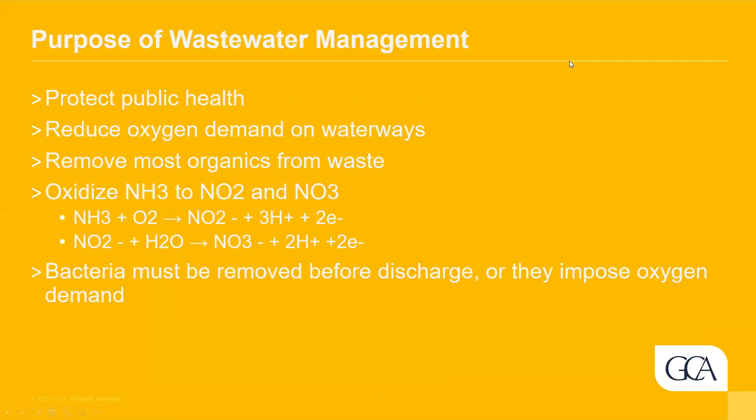Here we are, Gulf Coast Authority, and I'd like to speak about the purpose of wastewater treatment and wastewater management. Obviously, it's to protect the public health. Gulf Coast Authority was created by the state of Texas to protect the waters of the state of Texas. And we had the unique ability to build regional wastewater treatment plants, which means we can combine multiple cities and municipalities, MUD districts, and industrial wastewater plants in one collective plant.

For example, our Bayport facility has 83 different industrial wastewater streams. The facility I'm at has 4 different participants, being 2 cities and 2 MUD districts. We also have 3 other plants that are collectively treating industrial wastewaters. So we have the unique ability to write permits and hold the users accountable rather than those users going through TCEQ.

Part of the wastewater management purpose is to reduce oxygen demand. As you may know, lower DO in the receiving stream can cause fish kills, and it's harmful to aquatic life. So our number one concern is that aquatic life and the environment of the receiving stream. With our wastewater treatment plant, we remove organics from the waste. We oxidize ammonia to nitrite and nitrate, and the bacteria is removed before discharge through disinfection. We have multiple ways to disinfect, and that's our final treatment process.

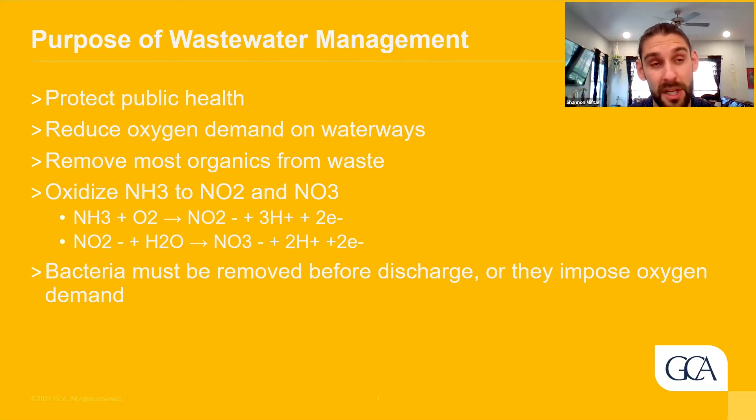And we're beginning to have more and more regulations with new criteria that need to be met in coming years. So that will potentially add more treatment processes.

To start with the fundamentals of wastewater treatment, in a regular municipality, we have our collection system. That's the sanitary sewer line that runs underground. We have several connections coming from houses, commercial units, as well as industrial and any site that you may think of: your houses, the car washes, the malls. They have a gravity sewer that runs to either a force main or another gravity line.

These sanitary sewer pipelines usually run via gravity to a lift station, which is a large sump that has multiple pumps that lift that water from the lowest elevation to a higher elevation. That way it can ultimately gravity flow through the wastewater treatment plant. So this is the initial part of the treatment. No treatment actually occurs here. It's just the collection system to get the wastewater to the receiving plant.

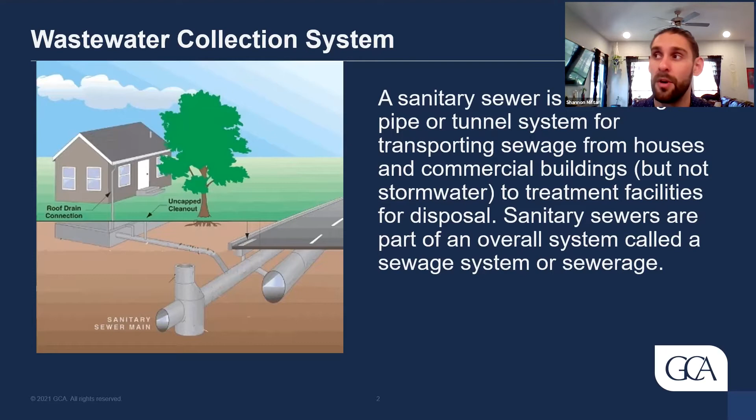Here we have what is called pretreatment. This is where we have raw wastewater, and we try to take out some of the inorganic materials. Things that you can imagine: debris, any sort of logs or plastics, beads, any sort of thing that may enter your collection system that can be removed via screening.

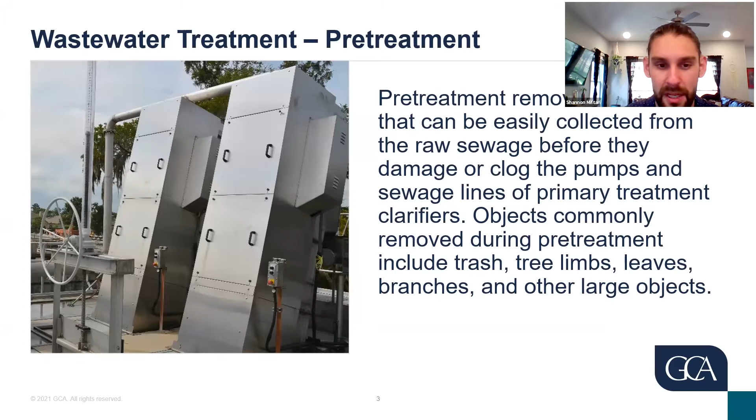Here, this is actually a picture of our wastewater treatment plant that has 2 bar screens. If you remove those covers, there are these 1/4-inch screens that keep all the rags and other inorganic debris out. They have rakes that lift up all that inorganic material, and it goes into a conveyor that's ultimately compressed and thrown into a dumpster. That will be hauled on a weekly or bi-weekly basis.

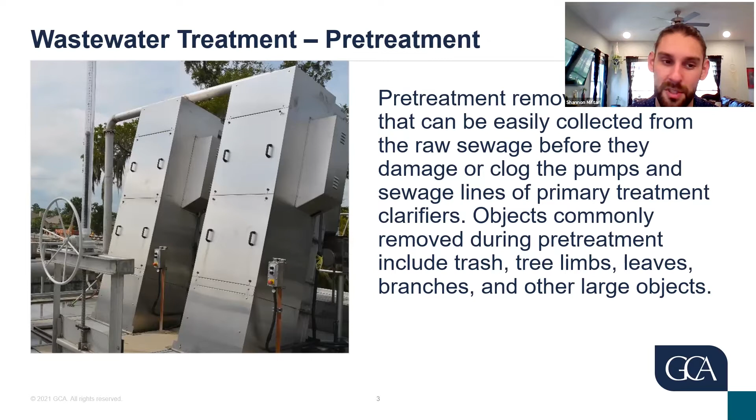The purpose of this is strictly pre-treatment. We're not into the biological or any other treatment process here. This is just removing materials that can cause issues to our pumps and other processes.

So here, in the pre-treatment, again, we have screening of inorganics, and an issue we've been having as of late, one of our main focuses to educate the public on, is things like baby wipes. Although they're said to be flushable, they cause many disruptions downstream. They may be able to enter your gravity mains and your force mains, but when they get through to the screening process, they can cause lots of issues as well as through the pumps.

So things like the coffee grinds, your bacon grease, the fats that may be poured down the drain, and primarily the baby wipes will come in and they'll clog the pumps and they'll get stuck in the rotating assemblies. And that's been our main driver for maintenance and cost at the wastewater treatment plant.

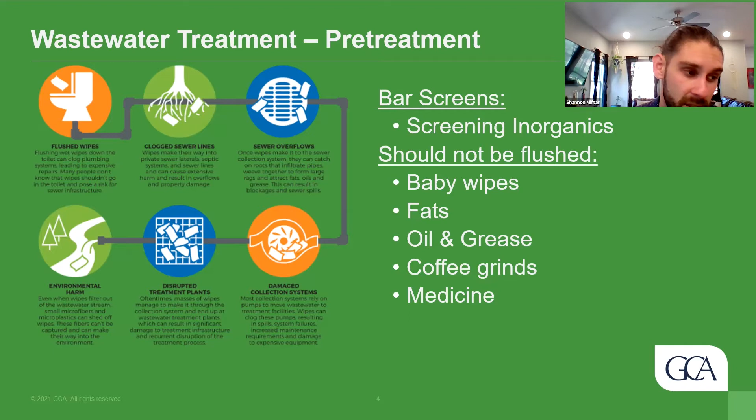So if you speak with your students, that's one thing that I always promote mentioning is that baby wipes, although they say flushable, they can cause millions of dollars worth of damage. And we've seen that at many places like in New Jersey, city of Houston, all throughout the nation. This has been a big dilemma, there's been lawsuits out, there's been a lot of activity here to prevent that.

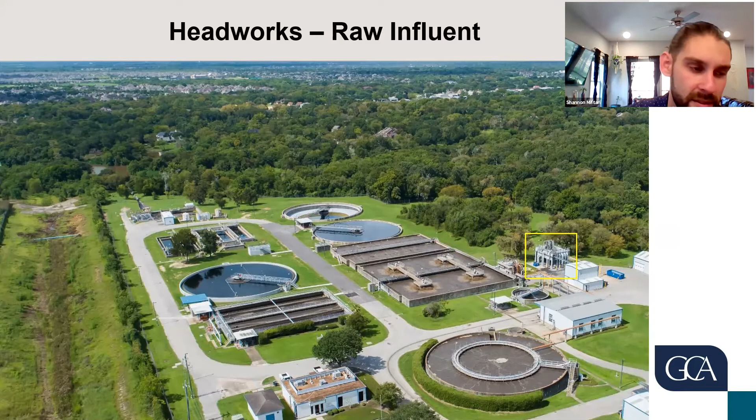So in our treatment plant, we have this yellow box of our Headworks. Basically, we have off-site lift stations that'll lift the wastewater from a lower elevation spot up to the Headworks, which in this case is about 25 feet off the ground. So it pumps to a sump that's elevated, and from there it'll gravity flow to the other stages of the plant. And the reason we want the gravity flow is to minimize the need for pumps or backups or other issues that may happen. So next we move on to the biological treatment.

This is basically the heart of the plant. This is where the majority of the work occurs by our microorganisms that are found naturally occurring in our intestines and are naturally occurring in the environment that we're providing. Basically, our goal is to provide enough oxygen, the correct temperature, and enough nutrients to keep the healthy bugs alive and consume all the organics.

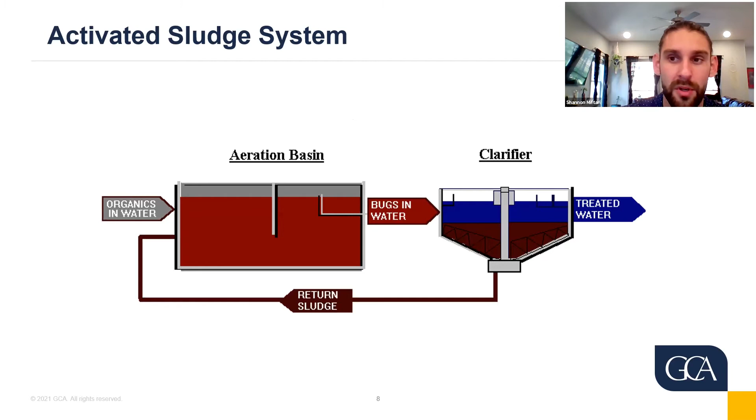So here, this is the heart of our plant and most of our plants for the authority. We have a secondary treatment process. So our aeration basins are the biological process. This is where we have the raw sewage mixed with the sludge, and we provide compressed air into the mixture. All of our plants have dissolved oxygen in which we supply air via large blowers.

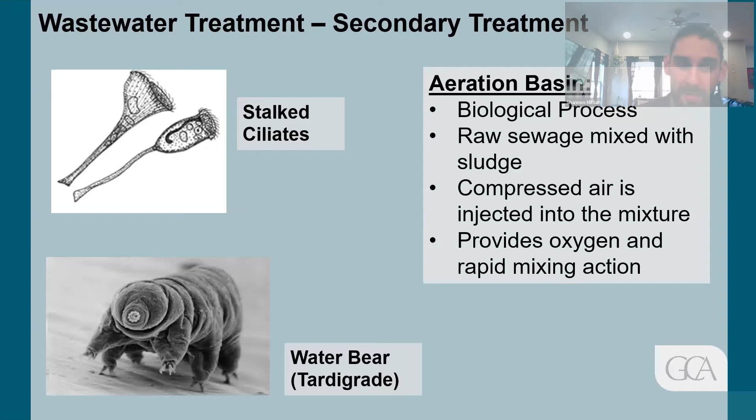And these, or through mechanical aerators, which are essentially these big motors and gearboxes that are attached to a large fan blade that causes a mixture and dissolves oxygen into the water. But newer technology includes blowers that supply piping into the basin and provides compressed air.

Some of our plants also have a direct oxygen line, and our goal is to also provide mixing. If you have dead zones, you can have septic sludge, foul odors, and other issues. So it's really important - if you do not have a good blower system, the result will be untreated wastewater.

This is likely the most important part of the treatment process for activated sludge plants. Here we have a couple images of microorganisms you may see. A very popular one is the water bear, the tardigrade. It's been known to be the one microorganism that can make it to Mars and survive. It's nearly indestructible, naturally occurring in our intestines, and also seen in our wastewater.

So if we collect a sample of our sludge and put it under the microscope, it is likely that you'll run into a water bear, stalked ciliates, and many other microorganisms.

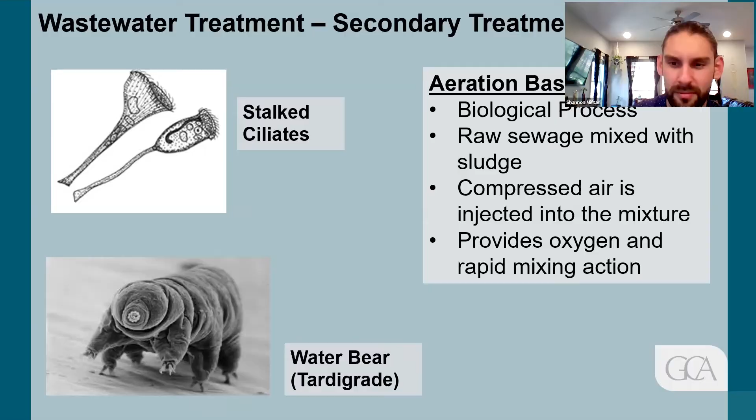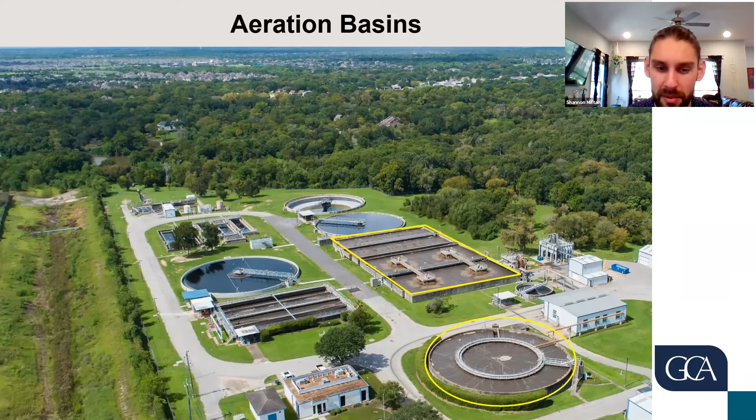Here's a picture of our aeration basin. We have 5 basins here in the rectangle. The front 2 basins, you'll see those 4 squares - those are mechanical aerators mixing the water with large fan blades. On the back 2 and the front circular one, you can see air bubbling in, and that's how we provide dissolved oxygen.

At times, if you have an upset in your plant, the sludge will belly up or build up so much that it starts to go over the weirs. When those solids go over the weirs, it'll clog up the rest of your system or not allow your disinfection system to fully penetrate the water and disinfect. That's a big issue that we try to prevent, and it can happen with major power outages, a bug kill, or equipment that's shut down.

Yes, Larissa, question? So I see all of that is like open air treatment - is it good when it rains a lot for water treatment plants, or is it not ideal? Or does it matter? Yeah, that's a great question.

It's actually our biggest harmful issue for most wastewater treatment plants. It's not supposed to be, because ideally your city has a separate stormwater system that does not go to your wastewater treatment plant unless permitted, which is rare. But regardless, what you'll see is I&I, inflow and infiltration, where water infiltrates the system through broken pipes, open manholes, or gutters directly piped into your sewer, which they're not supposed to be - or just a large volume of rain after the ground gets saturated will infiltrate the system.

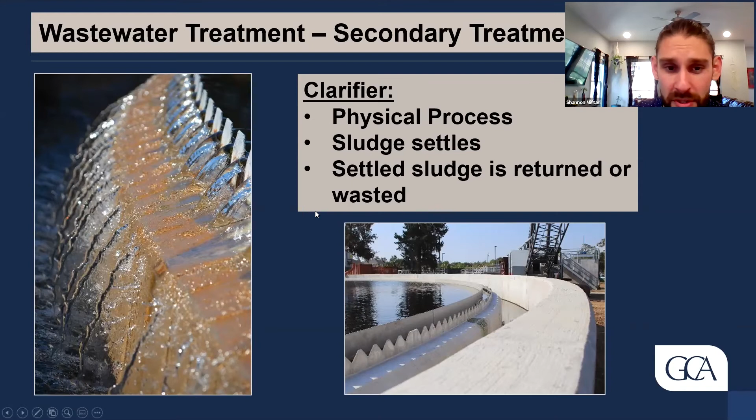And also when you have these major freezes and you do not have power for an extended period of time, you can have a bug kill just from the lack of that mixture and the lack of the dissolved oxygen. And what you'll have to do is remove all that sludge. It becomes septic sludge. So you have millions of gallons of septic sludge that you have to essentially get to the landfill. And that for us took roughly 3 or 4 months. So natural disasters is what to look out for.

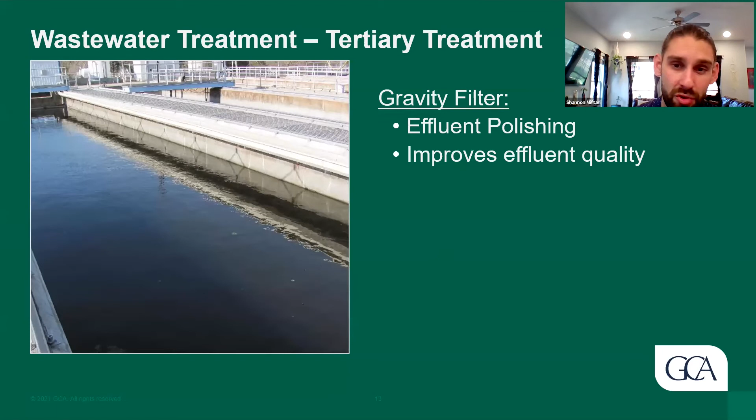So post the secondary treatment, not all plants have this, but what we have is tertiary treatment through gravity filters or sand filters, as you would see in a fish tank or aquarium. There's basically sand and anthracite here that takes the effluent water from the clarifier and polishes it through these sand filters. And we'll have these traveling bridges that continuously clean the water. The reason why we're required to do this is because we have a disinfection system that requires strict clarity in the water. And we'll discuss that next.

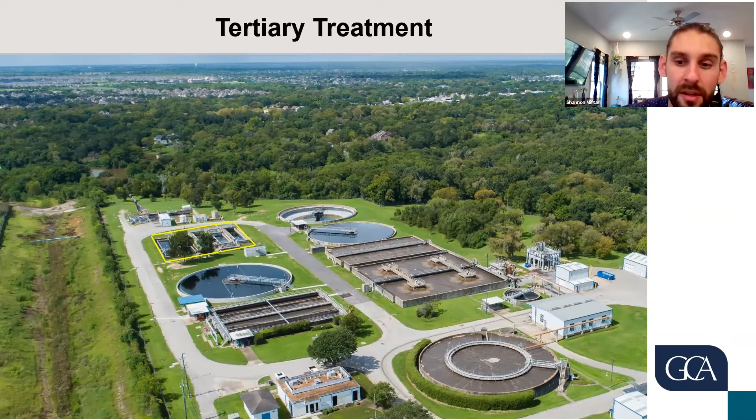Here's our tertiary treatment. We have 5 sand filters, and we continuously see evolution of this technology that allows for greater flows and different media, different materials that better polish the water. So we're working on upgrading those because they were built in the 80s and 90s. With new technology, you can increase the flow and the flow per surface area by 4 times or 5 times.

The United States is kind of behind on ultraviolet treatment in wastewater treatment plants, but in other countries, you'll see UV predominantly as their disinfection process. And we're starting to do that a lot more here. After disinfection, this will be our fully treated wastewater. And we have the ability to reuse this water as non-potable water for irrigation, or it's reused throughout the plant to wash down areas or supply water to our equipment like our belt presses.

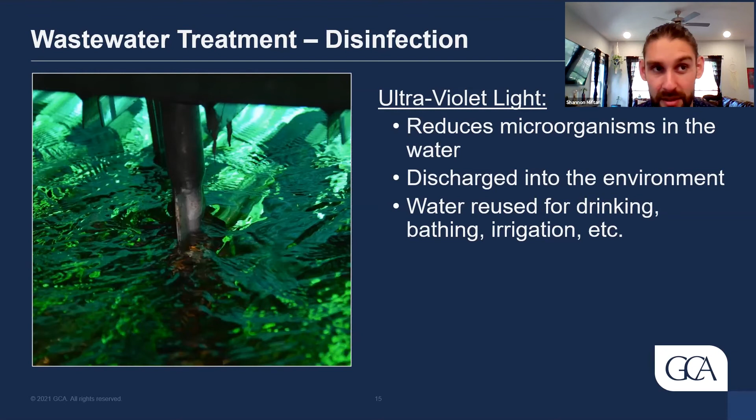And now we're also starting to see direct reuse. So you'll see wastewater treatment plants with a pipeline that directly sends water to a water treatment facility. And that's also something that I look forward to in the future, because we will have strict control of our wastewater that's being sent to the water treatment facility. Currently, what we do is we discharge our wastewater into a receiving stream, and then we pick up from that receiving stream to create drinking water. And you will see actually more difficulty in controlling those parameters that are coming into the plant. It's a big topic to try to get the public aware and accepting of the idea of from toilet to tap, but it is on the horizon. And Texas already has one treatment facility, I believe in West Texas, that is already having direct reuse.

So our disinfection is here at the back left part of the plant. And if you can see that long line of water, that is what's called a Parshall flume. After disinfection, it'll go through that channel and we'll test our dissolved oxygen at that point, as well as the rest of the parameters. Our permit limitations are written into a table of our permit. And generally, what you'll see is limitations on biochemical oxygen demand, on ammonia, and on total solids, as well as dissolved oxygen and pH. So those are common parameters for municipalities.

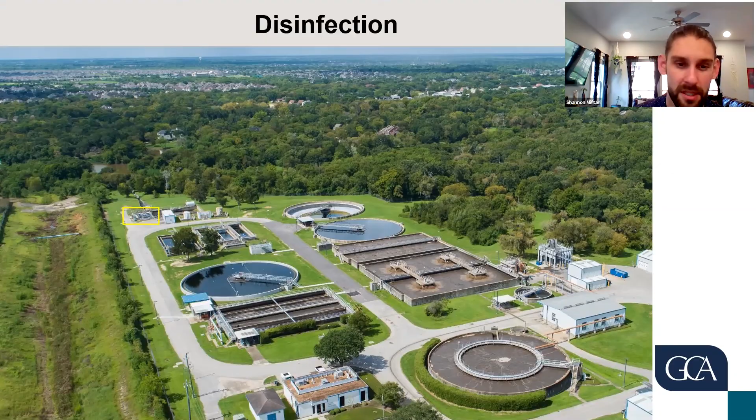In industrial wastewaters, you'll see a very long list of organic compounds consisting of roughly 200 compounds that need to be tested for and analyzed and have their own permit limitations as well. So here, I know your students will be doing a different sort of sampling. Here we have a gentleman picking up a sample. It's important to read your permit and correctly identify your sample point. Otherwise, this can be a violation by not collecting in the correct spot. Typically, what you'll see is a composite sampler that collects a sample either based on flow or based on time, and it needs to be refrigerated at a temperature of 0 to 6. Or otherwise, what you'll have is grab samples.

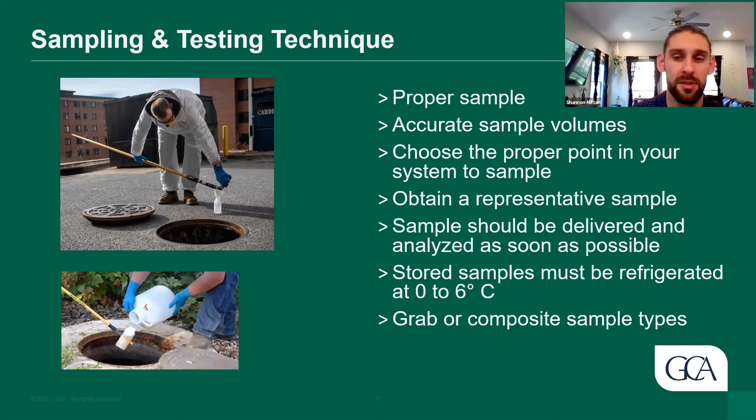And grab samples are required for certain parameters. And sometimes those grab samples will be composited for that 24-hour period. And again, some samples need to be refrigerated, some don't. Some have long holding times, like 1 year, and some have holding times of 8 hours. For example, enterococci needs to be analyzed almost immediately. pH needs to be analyzed in 15 minutes. Dissolved oxygen needs to be analyzed immediately. So there's different parameters, different requirements for each testing method and technique.

Here are some of the testing that we do on our wastewater. Our DO uptake measures the rate of oxygen use, so our dissolved oxygen. SVI, sludge volume index, that's something we use to detect the settleability. MLSS calculates a number for us to detect how healthy our sludge is and how well it'll thicken. Same with the zone settling velocity, what we typically call the 30 minutes settling test.

And we pour up our sludge samples into cylinders and we'll see how it settles, whether it settles evenly, rapidly, slowly. If it floats, that'll tell us the age of the sludge. If it settles rapidly, it's typically older. If it settles very slowly or not uniform, it's younger or could have a filamentous issue. Generally, you want your sludge to settle evenly and you want a sludge of about 300 or 400 milliliters out of 1,000.

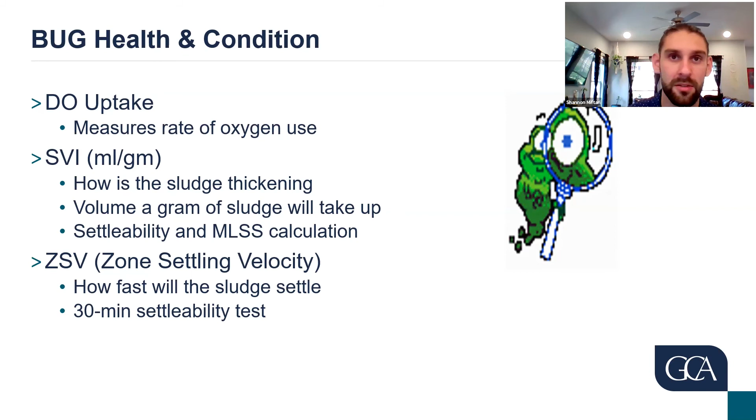And then on our discharge permits, obviously any treatment plant is not allowed to discharge without a permit. Here in the state of Texas, all of our permits are through TCEQ and we have TPDES permits. This is why we were created, to abide by these permits and meet the Clean Water Act.

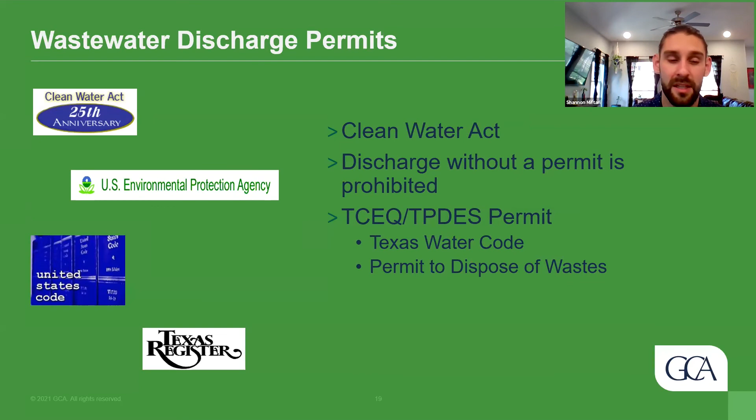Some of the limitations and conditions we spoke about, and our goal is to continuously monitor and report any issues that we may have. We're required to report any issues within 5 days or 24 hours if it meets certain criteria. Otherwise, it would be in our monthly discharge monitoring report. So every month and it's public information, we submit our discharge monitoring report with all of our sample analysis data

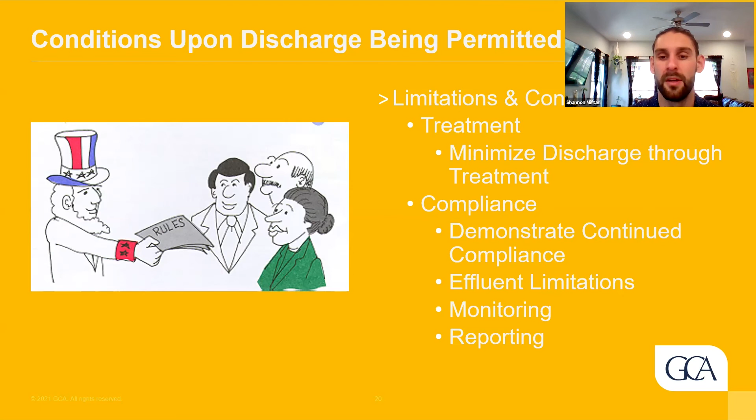regarding our effluent limitations. So some of the basic functions of a wastewater permit here are listed. There's different levels of performance, and it requires a discharger to report failures. If you're part of any public system, we have online capabilities to upload this information, and we'll send it via email and hard copies as well. And we'll have to notify the public should it exceed a certain volume or a certain limitation.

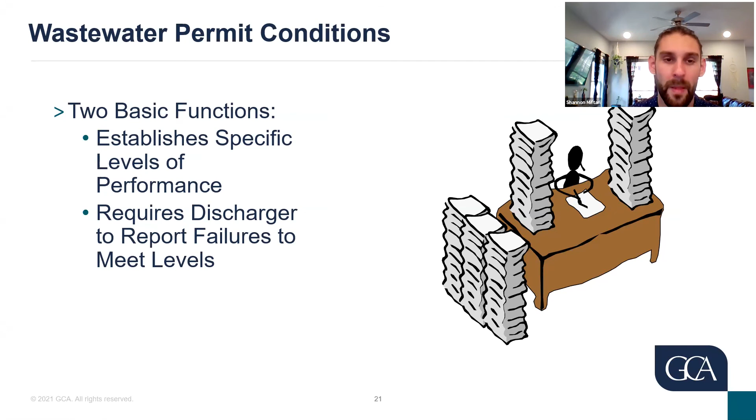So to conclude, wastewater treatment is designed to protect the public health and the environment for recreational use in the receiving stream. There's different steps to meet our treatment goals, and there's different permit limitations based on your type of treatment plant and what your raw wastewater is. And we're always required to monitor and issue our analysis to the state of Texas.